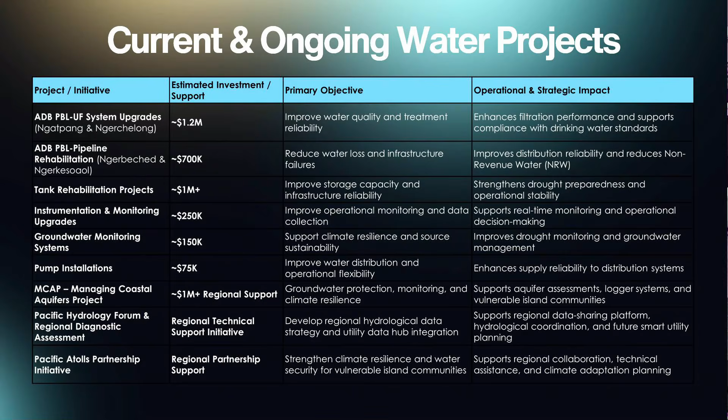Right now we're slowly building the foundation for a smart utility system where monitoring and operations are connected as one system. This is the direction we're looking into for the future of water operations. In my next presentation, I'll further discuss the transition from traditional utility to smart utility, the direction we're trying to move toward. Thank you very much.

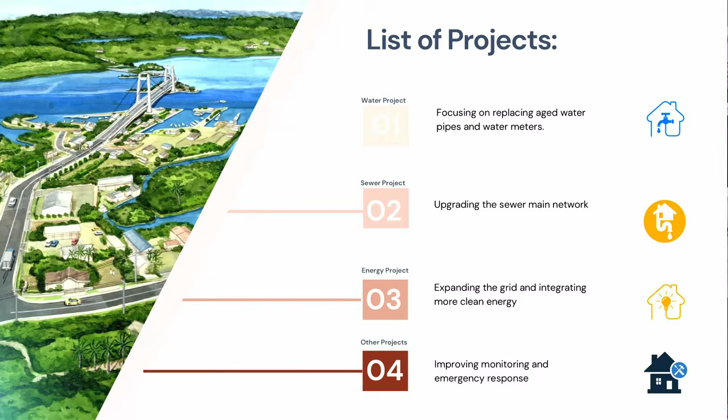I guess for a lot of farmers and people from agriculture, you know the saying, farm to table. For people who protect the environment, there's a saying, they protect from the ridge to the reefs. From PPUC, we care from the sunlight to the street light. And if it's water, we see it's raining outside, we take it from the clouds to the comfort room.

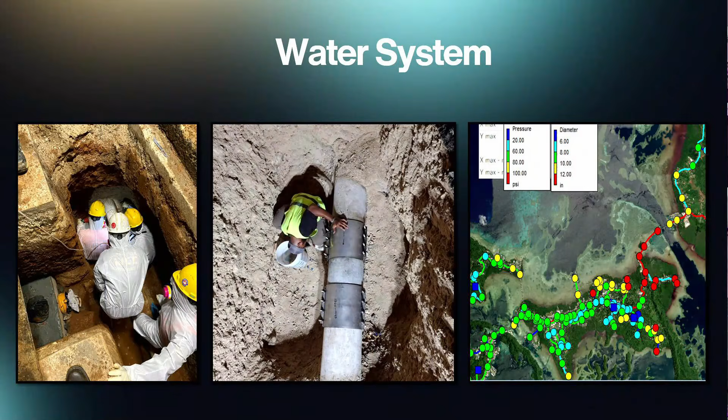So for the first system, I would like to cover the water system. The 3 pictures I present today show some of the main issues we are facing on the water system, and I believe everyone in this room is aware or has some idea of these issues.

The one on the far right and the middle picture show our people replacing or repairing one of the very old asbestos cement pipes. You may see from the attire in the picture on my far right, it's a hazardous material, hence the full PPE. Those pipes are over 60 or 70 years old, hence they frequently break.

The picture on my left, where you see green, yellow, and red dots, shows the current water pressure of the Koror area. Good water pressure would be higher than 20 psi and would fall around 40 or 50 psi. From this diagram, we can see there are still a lot of areas that receive more than that.

If you receive water pressure higher than that, the system is more susceptible to breaks and leaks. Hence, we have a very high non-revenue water, or NRW, close to 50%. The red dots are areas receiving water higher than around 100 psi. The yellow is close to 80 psi, and the green is close to 60 psi.

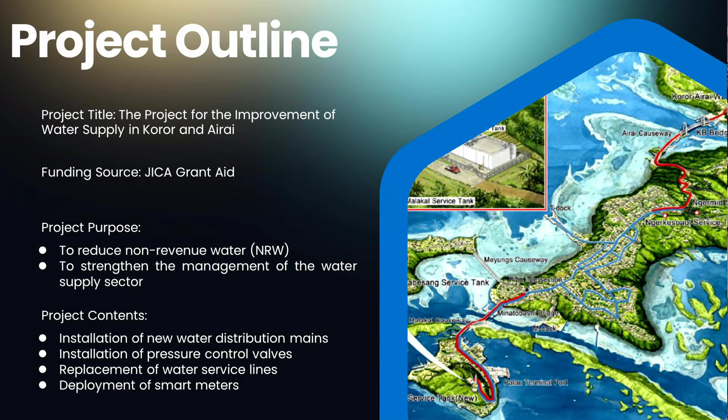We will also be installing pressure control valves throughout Koror. As I said, we still have areas that receive over 100 psi water pressure, which results in more frequent breaks. We will also be introducing some new technology, for example, smart meters.

With this project, there are 4 main issues that we face on the water system currently. We have old water pipes, which are still asbestos cement. We'll be replacing them with plastic pipes, both PVC.

The PVC is the pipe that we currently have on island. We're also going to be introducing HDPE pipe, which is like PVC, but thicker and more flexible. Our hope is by introducing that pipe, we'll face fewer breaks in the future.

We have a high non-revenue water. Non-revenue water is basically water that's treated and not being read at the meter. So we'll be introducing pressure control valves on each water tank to better regulate the pressure, and provide training to our leak detection team so that we can find leaks that do not come out of the ground. We'll also be replacing about 1,000 water meters throughout this project.

Before, in 2016, our thought was that non-revenue water or leaks only came from breaks on the water line. We've come to realize that a large percentage of the non-revenue water also comes from inaccurate meter readings or inaccurate meters. So in 2021 to 2022, we did a pilot.

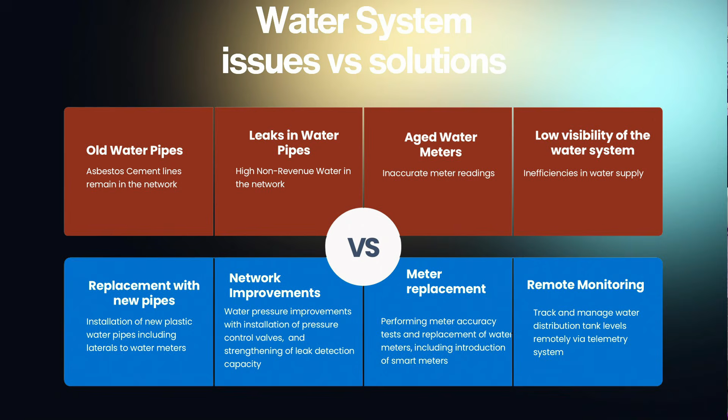So for CASP, we've already finished installing the sewer lines. We've finished constructing some of the sewer pumping stations - this one is in Makati. We finished constructing a new sewer treatment plant. And we've also constructed, I don't know if everybody knows, but under CASP, we've constructed 2 public toilets.

So for the sewer line, we've installed it from Makati all the way to the CIP office, skipping Minatobashi, and then from Malakal all the way to the sewer plant. We've also constructed a new pumping station at Makati, and that was in 2019.

We've commissioned a new sewer treatment plant that's currently in use. We've been using it since November 2021, and we've constructed the public toilet at Erongul Park, and the toilet at Long Island. But again, it's not our service to operate and maintain, so we did an agreement with Koror State - operation and maintenance is with Koror State.

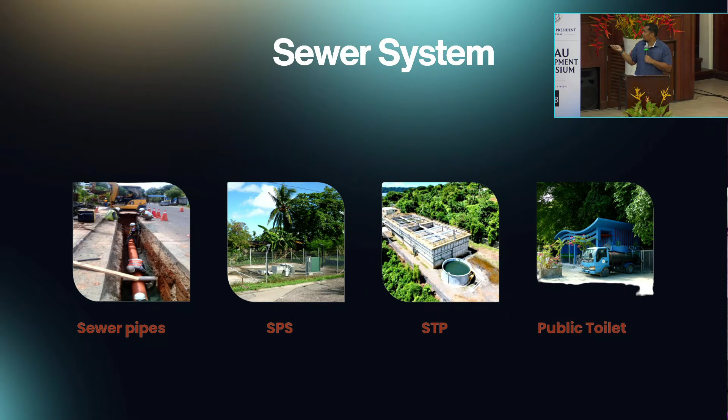So what is still left in the project - we've completed all that, but what's remaining is the sewer line from the CIP office, the old CIP office, to the Malakal treatment plant, which is not yet operational. There are 3 reasons why it's not operational: the new pumping station at the CIP office is not yet complete, the connection at the Minatobashi line is not yet made, and the sewer pumping station across the Malakal port is not yet complete.

So under this project, and we know that CASP has been ongoing for over 10 years, in 2023 I recall with the effort of the Congress and the Office of the President, they did an MOU with ADB to say let's look for funds, in grants not loans, to complete this project. So ADB has provided a $2 million grant to complete this CAS project.

So if you head towards Malakal, you'll see we've already fenced the old CIP office area and construction is now ongoing. At the old CIP office we've started construction - we broke ground for the first time for this project 2 weeks ago. Near the new Minatobashi construction, you'll see WCC staff - those are the subcontractor for this project.

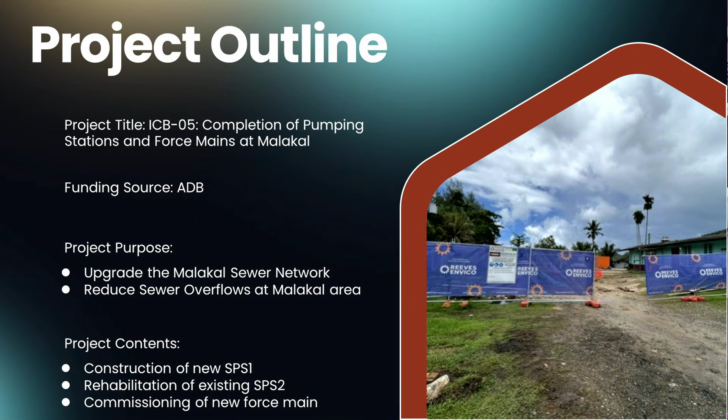So you'll see some Surangal staff working on Minatobashi, and then maybe some guys from Australia and guys from WCC working on this project. This is underway and we expect it to be completed this year, in November.

So after that project is done, we will have a fully functioning new sewer system from Makati all the way to the sewer treatment plant. That will reduce overflows at Libu Street, especially across Palau water and near...

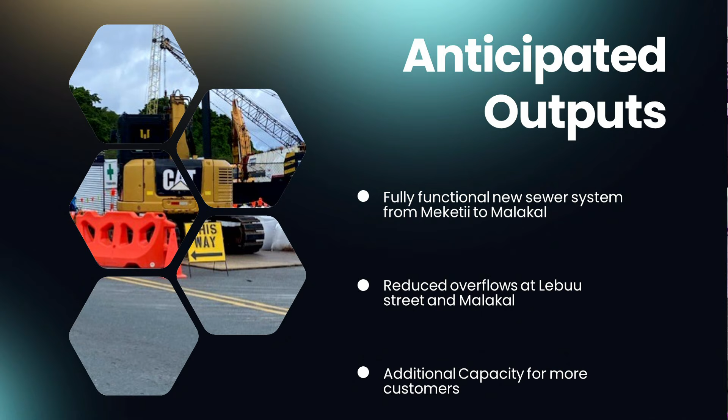Now, last but not least, I would like to touch on the upcoming and ongoing projects for the electricity system. This started 2 years ago, and we're now at the warranty stage. We've completed the installation of a new transmission line from Malakal all the way to Koksay. We installed over 450 new power poles and a new transmission line that runs from Malakal all the way running on the east side and to Koksay. So from this project, we expect to improve the stability of power.

I believe Manny will be sharing some information on this later. But one of the benefits we see here is - I know there's a project from the Republic of Palau to provide power to the new jail, a new correctional facility. With the facilities we've installed here, we're now able to extend power to that new facility.

Also, another project is - there's a large solar facility at Koksay, but we've also seen a large and very rapid growth of solar rooftop systems in Palau. So what we realize now is that, in addition to our diesel power generation in both Malakal and Aimeliik, we have an abundance of generation. What we lack since COVID is we haven't seen the same growth in load or usage. So what we end up with is excess energy.

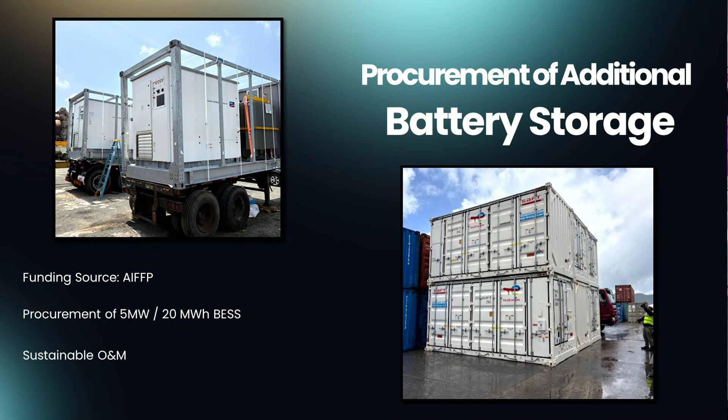Only 2 engines run with the solar. Now with this battery, we can capture the excess energy during the day and extend that 2 diesel engine operation, or extend the period where 1 engine is off. Rather than 5 p.m., we can extend it further, maybe to 8 or 9 p.m. The benefit is lower fuel consumption and better efficiency on the system.

Under the JICA project, we used to have aged equipment and low capacity. After that project, we now have newer equipment in Malakal, Airai, and Koksay. With this new equipment and added capacity, we can also

connect an additional 7,500 customers to the grid. With the additional battery coming from a grant, we will be able to extend the life of the engine shut-off, save fuel, and improve the economics of the solar project, hopefully leading to better power rates.

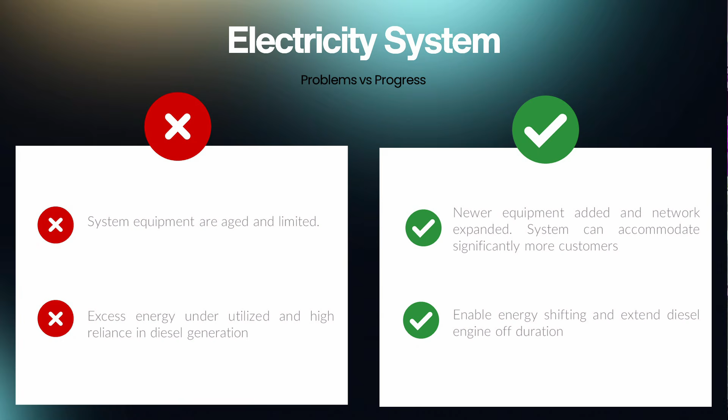So in summary, these are the upcoming projects from 2026 to 2028, all thanks to the collaboration that our government promotes with our partners, including JICA, ADB, AIFFP, and many more.

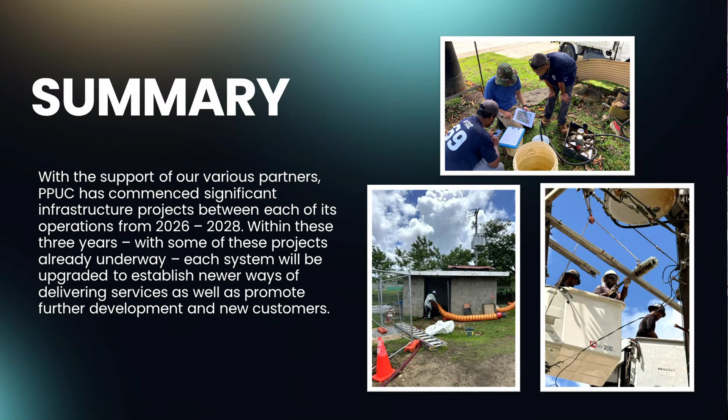With these upcoming 3 years and the completion of all 3 projects, we envision delivering better services as well as promoting future development in these new systems. Thank you.

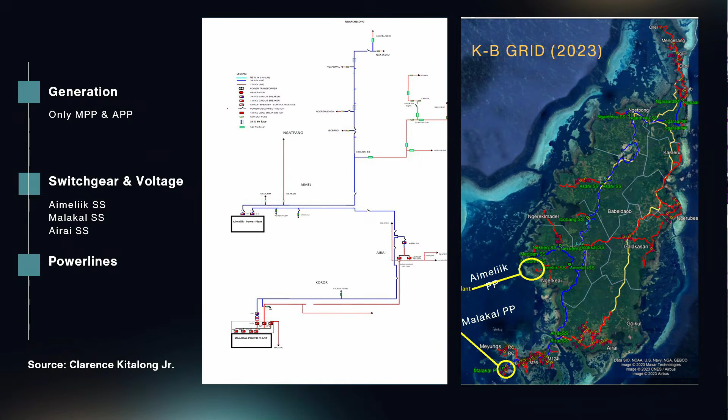So when I say it's a radial feed: the Malakal power plant has a single line connecting it to the Airai substation, the Airai substation has a single line connecting to Aimeliik, and Aimeliik going north is a single line. So if you lose any one of those lines, you split the power plants. That's what I mean by before 2023 it was a radial system.

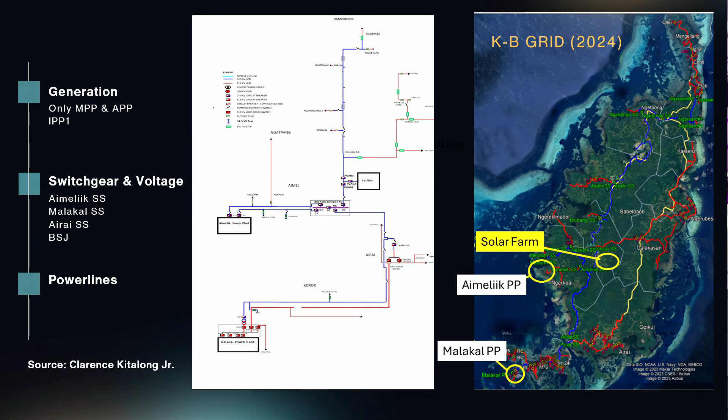Then in 2024, we had the introduction of the IPP solar plant as well as the bus stop junction. This was really significant in terms of system architecture because it added a loop, a redundant line between two of the power plants. It looks like this.

Malakal power plant and substation is connected with one line to Airai and one line to bus stop junction. But the difference that happened here was from bus stop junction to Aimeliik, there are two lines connecting it. So if you lose one line, you can still route power to the other side. That's what I mean by a redundant circuit, a loop - you have two lines connecting the substations.

So when we first connected bus stop junction, there was a power outage on the northern line between Aimeliik and bus stop junction, and the power plants did not break because we had an additional line that connected the power plants and kept them in sync together. So that was a big change.

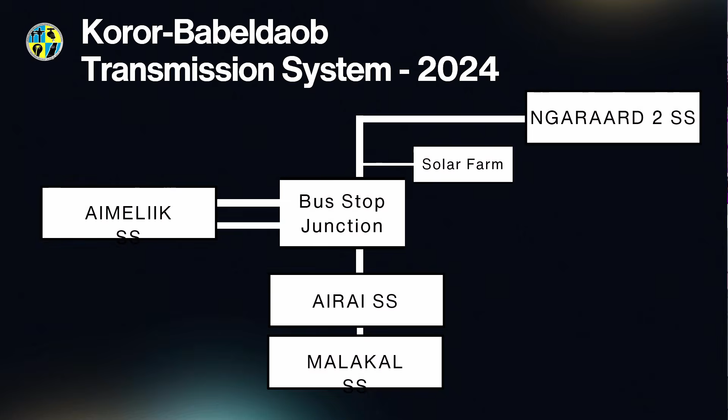We also added the solar farm to address the renewable energy targets we're mandated to meet. Talking about the IPP, it's funded by the Australian Infrastructure Financing Facility for the Pacific as the primary funding source, with Solar Pacific Pristine Power as the EPC contractor. Quick highlights: it's a 15 megawatt solar PV plant with a 12 megawatt hour battery, and it's supposed to give us up to 20% renewable energy in terms of energy usage.

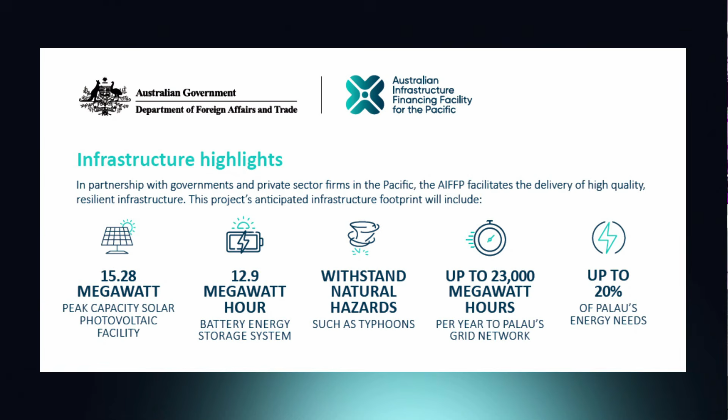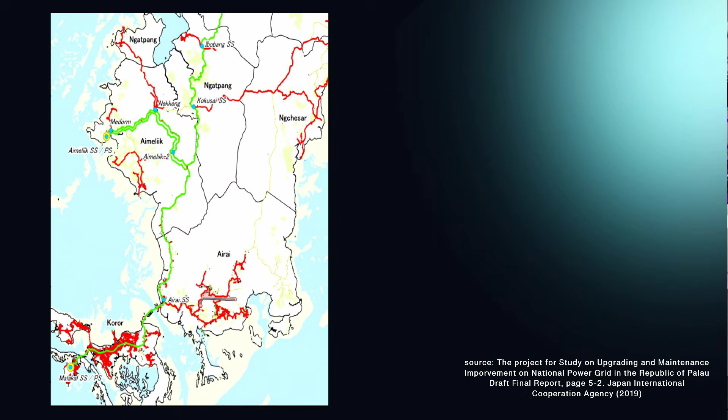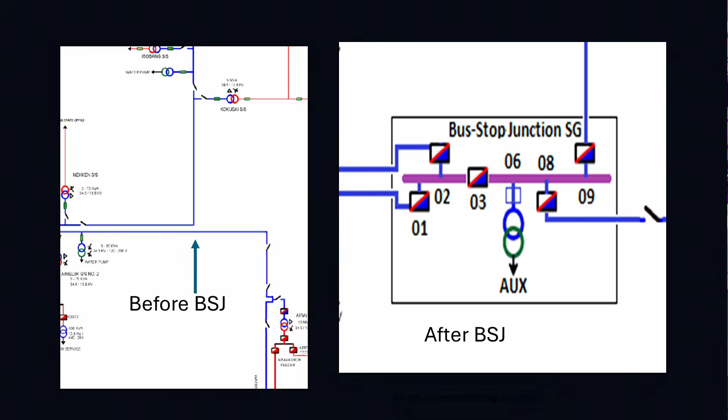So let's see - before the bus stop junction, there was a line connecting Airai straight to Aimeliik, and then Aimeliik going up north. There was actually a point, like when you're driving on the compact road and you turn into Aimeliik at that bus stop junction, where those two lines are physically next to each other but electrically separate. So what we did is put a bus stop junction there that connected them.

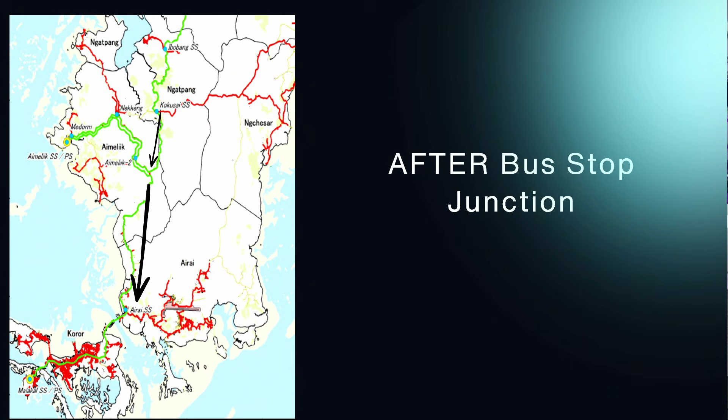The purpose is so that before and after the bus stop junction, power from Kokusai can go straight to the load center in the south without having to go to Aimeliik and back to the same point on the map. That reduces our transmission losses. Having that bus stop junction also increases the reliability that our solar farm can reach the load center in the south without interruptions between Aimeliik and the bus stop junction.

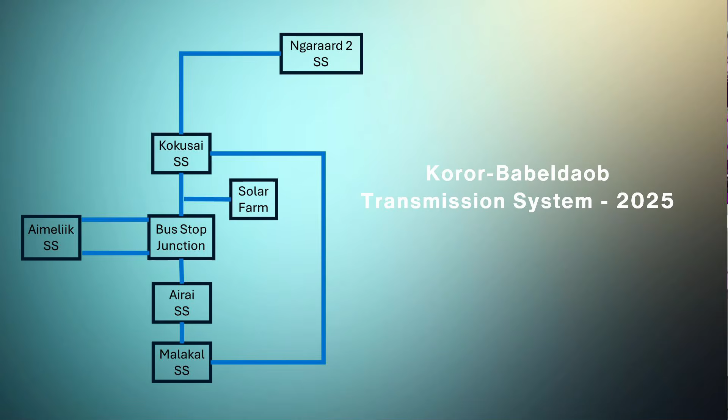So the next big thing was in 2025. We had a connection of the transmission line. The JICA project, which has just recently completed, installed a new transmission line running from Malakal substation in the south all the way up to Kokusai in the north.

And what that did is create another loop in the southern part. So if you lose the line between Malakal and Airai substation, Malakal is still connected to Airai substation by going through the loop. So when you lose a transmission line, you don't lose any service to the substations.

Which is important because we're moving all our customers to the substation connections, so this means that if you lose a transmission line, there's no power outage experienced by customers once we're complete with this. And that's a significant point.

About 3 weeks ago, we had an outage on the Aimeliik to Airai line. Prior to 2023, that would have been an island-wide outage. But 3 weeks ago, we had that same fault happen, and no one knew about it because we didn't lose power to any customer. That is the significance of having a loop, having two redundant lines to every single substation. And that's what we have right now.

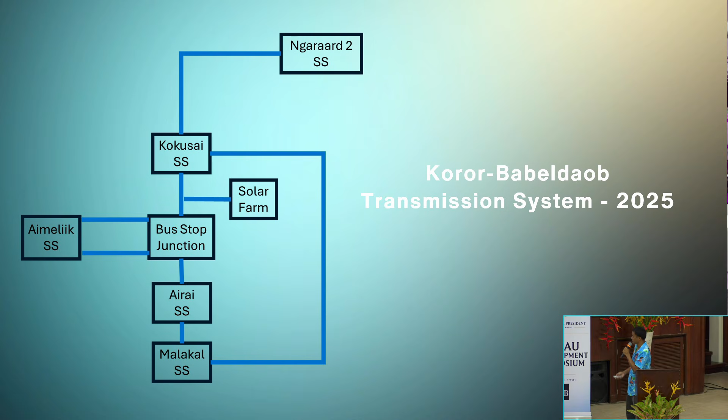Before, you had this radial system, let's see. On your left, there's a radial system where there's only one line connecting the substations.

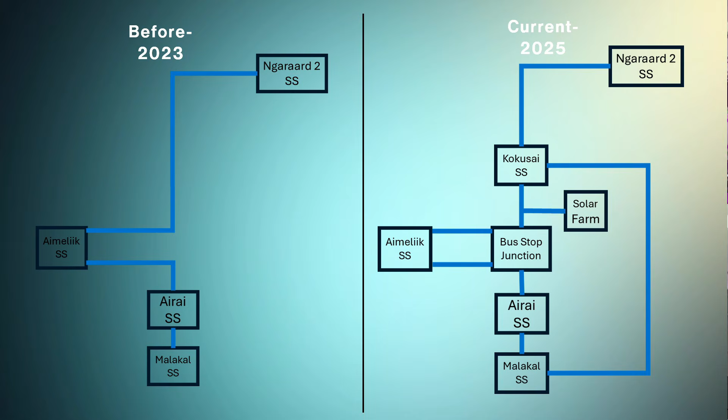Now in the southern Babeldaob, we have two loops. We have a loop between Aimeliik and Bus Stop Junction, and then a loop from Malakal to Kokusai, down to Bus Junction, and down to Airai substation. So if we lose any line on any one of those loops, we can still maintain our power to all the substations. This has greatly reduced our number of outages, as well as the time to recover from any sort of outages that does affect customers.

This is significant because what this will accomplish is provide the same sort of stability and reliability that the people here in the south today experience, in the north. And this is important for development of Palau because the first prerequisite of having development is stable power. So we will have stable power in the north once we complete this.

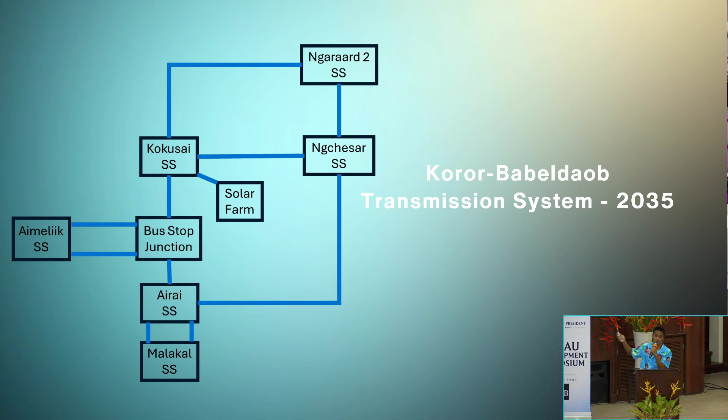And we make this transition to having another loop system. So if any section of the northern loop goes out, we can still route power to the other side, and only that section of the transmission line will be down, and it won't affect any distribution feeders.

So how are we going to do that? With our system control, this is all about the substations. We're going to be upgrading the substations, adding the Ngchesar substation, pulling the 34 into the Airai substation, and redoing Malakal substation. So a lot of upgrades to the substations.

We've already done most of the transformers. We're going to upgrade, add some other transformers, replace other transformers so that we can have really strong redundancy in our transformers as well.

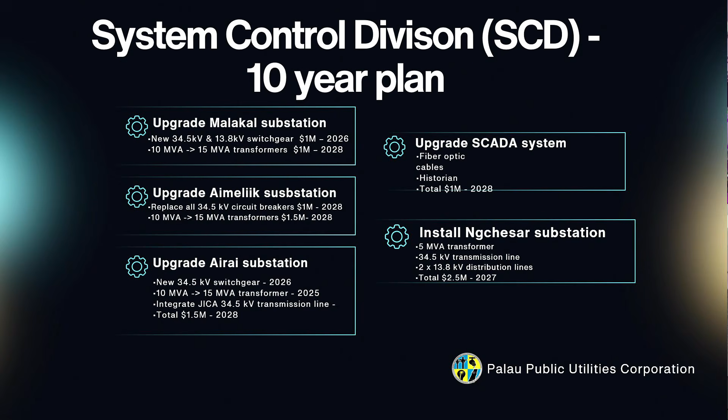They're in the single-digit metrics, as opposed to our goal, which is around 200 minutes per year. So that's 3 digits. Tokyo is at about 5 or 6 minutes per year. What that means is that in Tokyo, the average customer experiences 5 minutes of outages in a year.

For us in the Pacific, our goal is that the average customer experiences 200 minutes of outages per year. When we started in 2023, our actual was over 2,000 minutes per year. So that gives you perspective on the significance of changing this.

When you change from bare wire to insulated wire, you remove a lot of the outages caused by rats, birds, and snakes covering those insulators, because you no longer have a close path to earth. The insulators are about 6 inches long, so any animal that size can touch the line and the ground at the same time. If it's insulated, you can avoid a lot of these outages caused by animals.

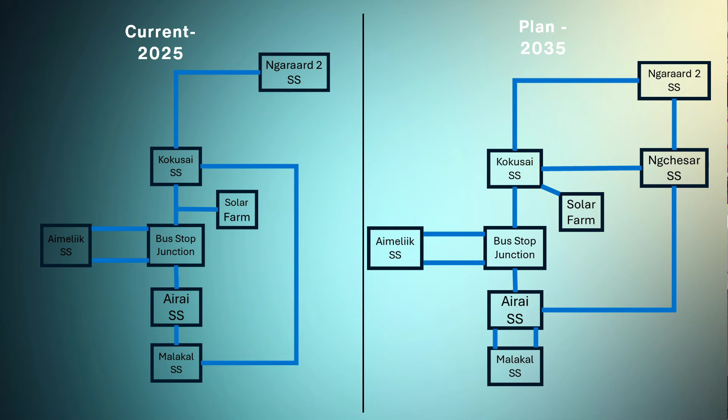So this is an overview of what we're going to be doing. Right now we have two main loops, Aimeliik Bus Stop Junction and the Southern Loop. But within 10 years, our goal is to have 4 loops for the transmission system, and to really increase reliability up in the north to promote development.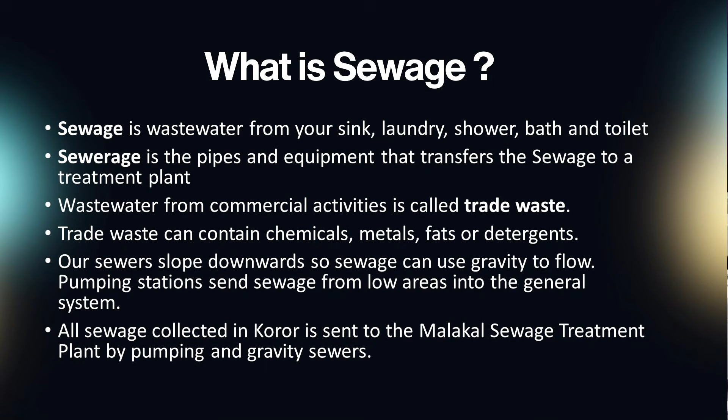So all sewage collected in Koror is sent to the Malakal sewage treatment plant, which is pumped and sent through the gravity sewers. The next slide is an overview, the map about the Koror sewage system.

We have two sewage systems: one is Koror and one is Melekeok sewage system. I'm more focusing on the Koror sewage system. We have about 42 pumping stations, which we call WCS, that's wastewater collection systems. All these pumping stations are across the hamlets, everything connected to the nearby manholes, and all the sewer is pumped to the pumping stations, to the laterals, and into the main gravity sewer main, which will bring it to SPS1 and SPS2.

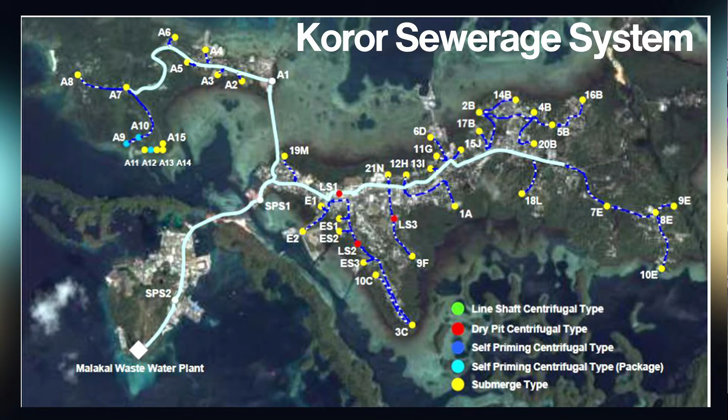All this sewage from across the hamlets is being brought into the main interceptor pumping stations. One is SPS1, close to the Minatabashi Bridge, and SPS2, in Malakal across the port area. Those are the main interceptor stations. We pump from there to the Malakal wastewater treatment plant, near the Icebox Park.

This is exactly what we have with reference to the problems in the sewers. We have an old system, already 50 years old, that we are still using. Each system has cracked pipes, broken pipes, and also collapsed pipes. All these lead to rehabilitation, meaning we have to repair all the time and make sure everything is always functional so that everything is carried to the sewage system.

Blockages happen because of grease buildup and foreign objects coming into the pumping stations. Our operations team regularly cleans the pumping stations, checking and making sure there are no blockages. If there are any blockages, we get reports and take care of those issues.

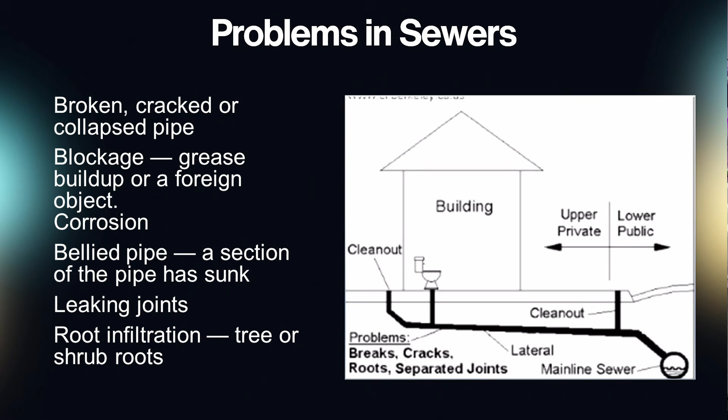We also have root infiltration and bellied pipe issues, which are being taken care of. Root infiltration happens because of nearby trees growing close to the pumping stations, which intrude their roots into the piping section.

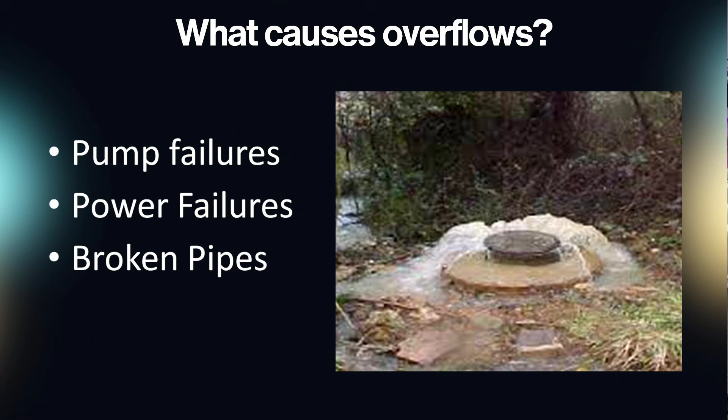What causes the overflows? The overflows are caused by pump failures, mainly mechanical and electrical failures. Also, if there is any broken pipe, the sewer cannot be brought into the pumping station, and in between, the manholes will overflow. So that is also one reason.

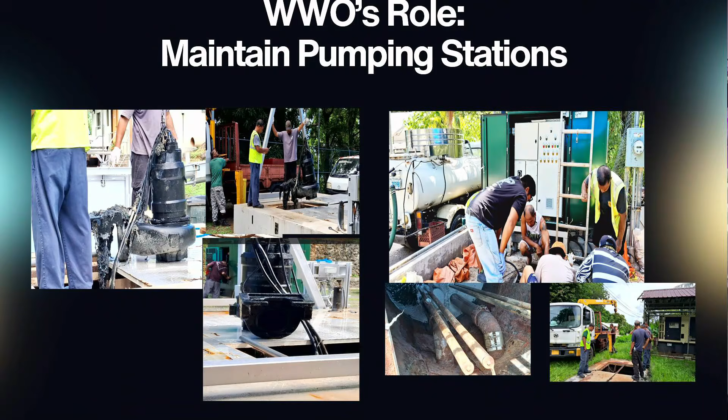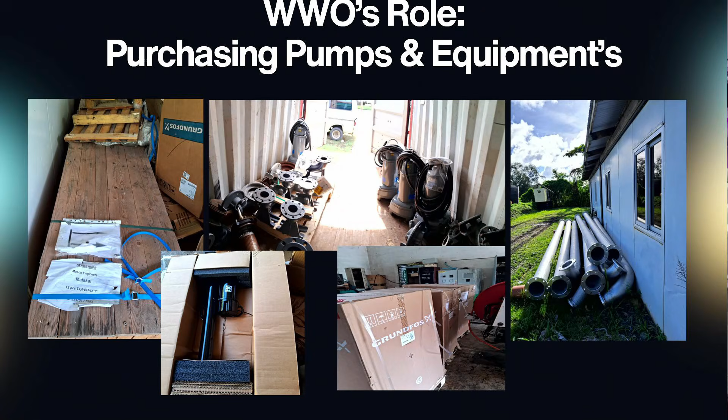Like that, we have 42 pump stations that we handle on a daily basis. We have a routine team handling these issues, and we also have a team, including me, doing all the purchasing of pumps and equipment required for this activity to go on smoothly daily. You can see the project requirements, some pipes and pumps, and also electrical components and devices we have already stocked for our activity.

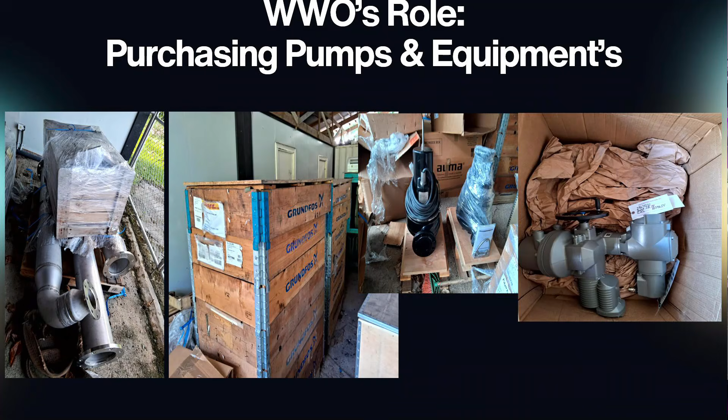This slide is also explaining some of our equipment and pumps for the plant, the treatment plant at Malakal.

I'll just give you a quick roundabout on the plant overview. You are free to come visit us, but the sewer smell might be a little awkward. Still, I would recommend you guys come meet me.

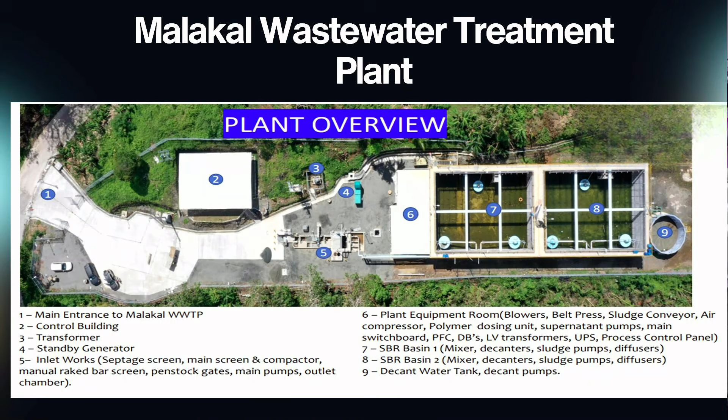I'll go into the next slide for your overview. That is the main screen I talked about, where all the rags and everything get separated from the sewer. Next to the right is the main inlet pump section, where 3 pumps are installed and working. Each pump acts as a duty pump, assist pump, or standby pump. Everything is electrically connected and controlled by variable speed drives, which are very costly equipment.

We have the blowers up there, 3 blowers, which are also electrically driven, and all the blowers send air into the reactors for the biological reaction process. This is not a chemical treatment plant, this is all a biological process.

After the process is done, the decanters will decant the separated treated wastewater into the outfall chamber and back into the ocean. There are also mixers in between the center of the basins, which are electrically driven. These mixers have propellers which drive the water for the mixing activity.

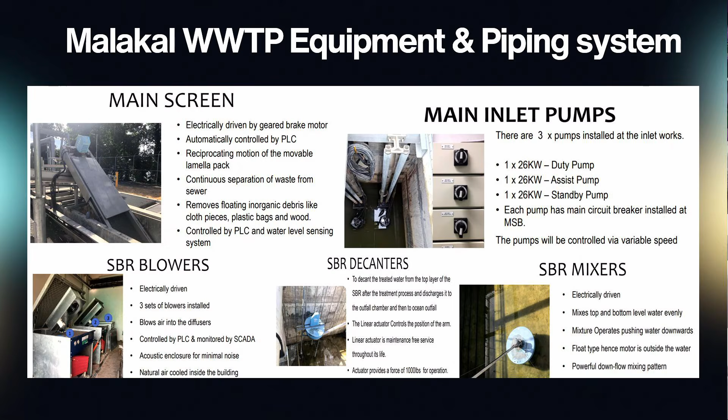The next slide has the sludge pump, at the bottom of the basin, which is at a depth of 7 meters. The height of the basin is 8 meters, so they installed the sludge pump at the very bottom. That's the pump which pumps out all the sludge from the decant at the bottom of the basin.

And into the belt press. At the bottom left is a belt press where all the sludge is brought onto the belt press, and on the gravity table along with the wash box, we feed decant water for the process to remove the flocculation and produce the sludge cake, which is transported to the landfill.

The membrane diffusers are also a major component at the bottom of the basin, connected to the blower piping, which blows air into the basin. That's where the DO, dissolved oxygen, is maintained. We supply oxygen to the reactor so it can do the reaction work.

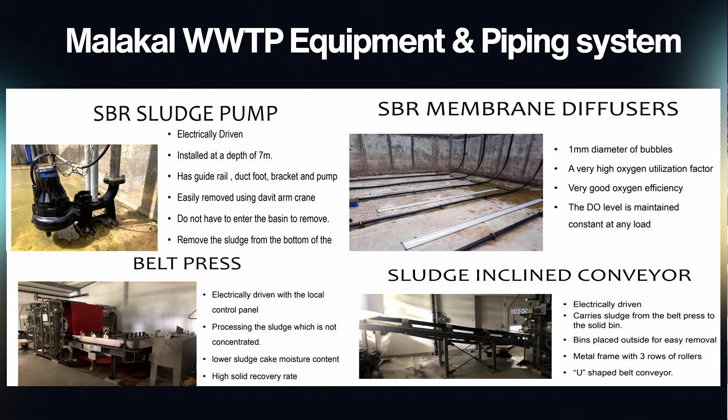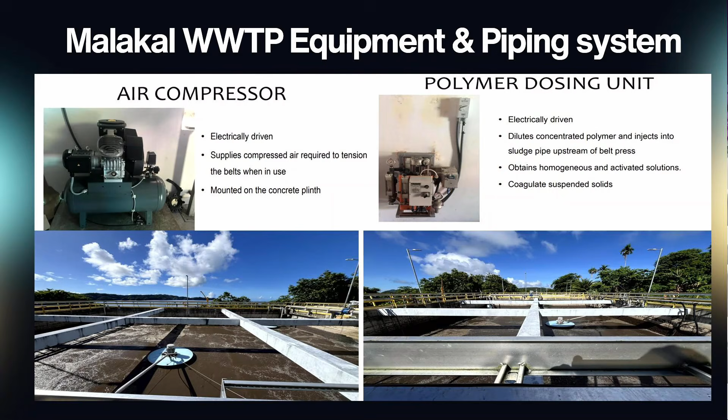The sludge line inclined conveyor is the belt that carries all the sludge into the bins. That's how the working basins look at the bottom. The top components are the polymer dosing unit and the air compressor for the belt press operation. This is basically all the wastewater treatment plant equipment and their piping system.

And we have our laboratory facility in the control building. And this is our team.

She's Kimi, our expert handling all the sampling and testing activity for the treatment plant. So we have some ADB consultants helping us with the process and the testing. We have recently rehabilitated our laboratory to accommodate more people to do the testing.

So this gives you an overview of our entire facility. This is a new facility, as I mentioned. Then comes the entire sewage network, like I told you in the beginning, we have 42 in the Koror region, and 8 in the Melekeok network. So altogether 50 pumping stations, and all these pumping stations are part of an almost 50 year old network. We need to maintain these facilities, and for that we need equipment and new pumps purchased every now and then to make sure everything is running and moving.

So equipment and structures are currently, in most cases, in poor condition. We are working on trying to reduce that situation, and we are doing all the required purchasing and installation of new pumps. We have already started repairing and upgrading the pumping stations.

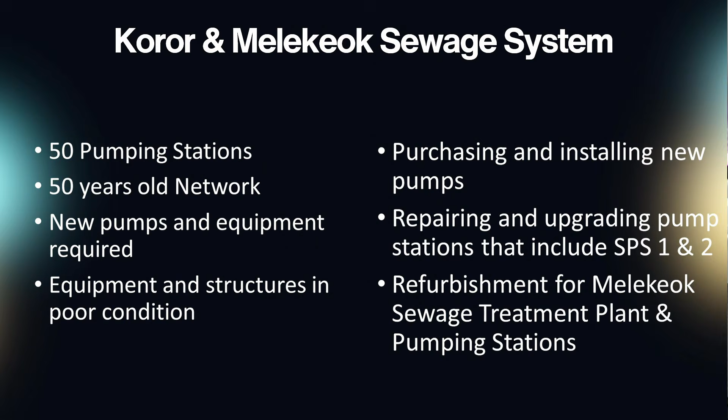That includes SPS1 and SPS2, as our colleague Mr. Anthony has already told you guys about. So we have a plan for refurbishment of the Melekeok sewage treatment plant so that we can accommodate more treatment process and more businesses connecting to it, and also the pumping stations. So this is our goal, sustainment and improvement efforts.

So the Malakal wastewater treatment plant, as I mentioned, was commissioned in October 2021 as part of the KASP project. This plant successfully meets the effluent quality discharge targets as provided by the EQPB board.

Then we have pumping station upgrade works going on in the Koror region, which actually drastically reduced energy consumption and also the number of uncontrolled sewage overflows. So this leads to our efficiency gains, like PPUC response time for system failures and customer work orders. We have reduced our response time to 2 hours. Before it was much higher, so we are trying to keep it as low as possible so that every issue is taken care of.

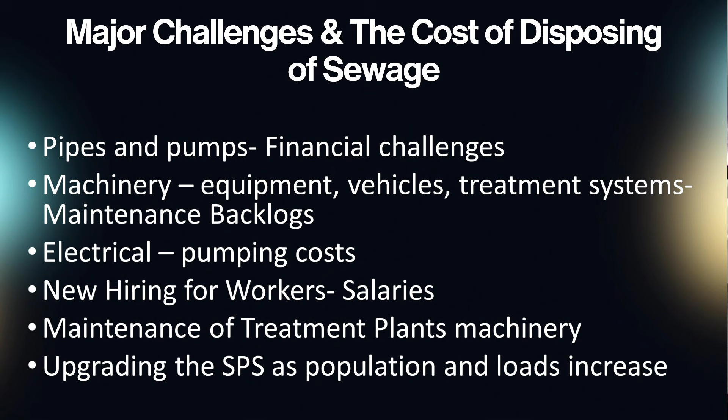So what are the major challenges in the cost of disposing of sewage? The major components are pipes and pumps, everything coming from outside. We have machinery and electrical components, and we need more team members and must pay salaries for them, plus maintenance of the treatment plant and machinery, and upgrading of SPS pumping stations as the population load increases within the region.

So future focus is to make sure we scale up our operations and reduce our downtimes, and focus on implementing cost-reflective tariffs, allowing the division to become financially independent. So with this, I'll finish my main activity. This is all about it. Thank you for your time.

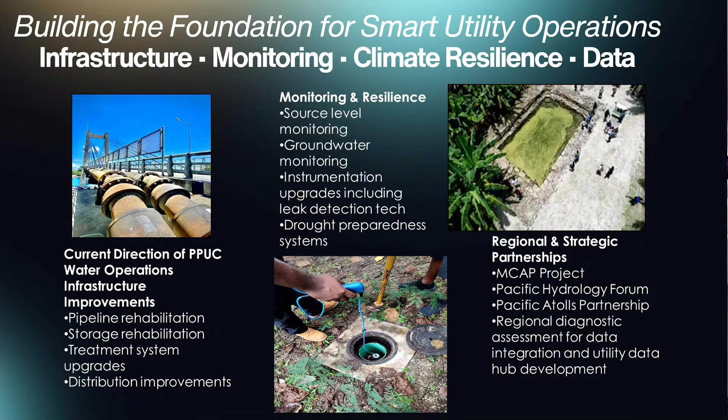Okay, next slide. So one area that is improving significantly right now is our operational monitoring programs. In the past, and still right now, everything is being manually monitored, and we're hoping this direction will improve this area. The overall goal is not to have full automation overnight, but to improve one step at a time.

My last slide. The future direction of our operations will also depend on how well we combine our infrastructure improvements, our monitoring programs, and our operational data into one coordinated system. So to summarize, we still have a long way to go, and we're hoping that all of this technology, the SCADA, GIS, and remote monitoring programs, will help us move along this roadmap for the future smart utility for water operations.

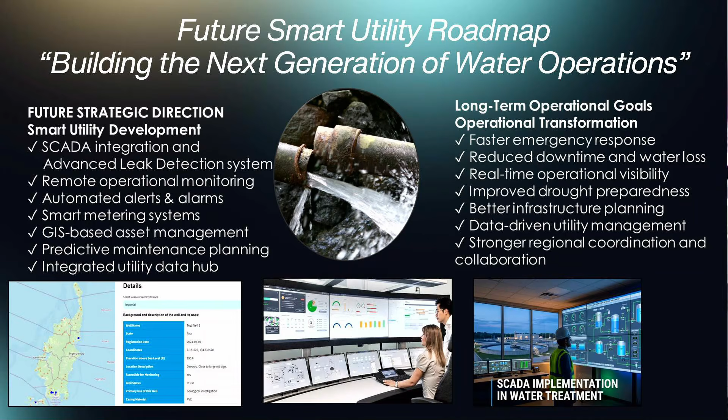That's it for me. Kaya? Sulang.

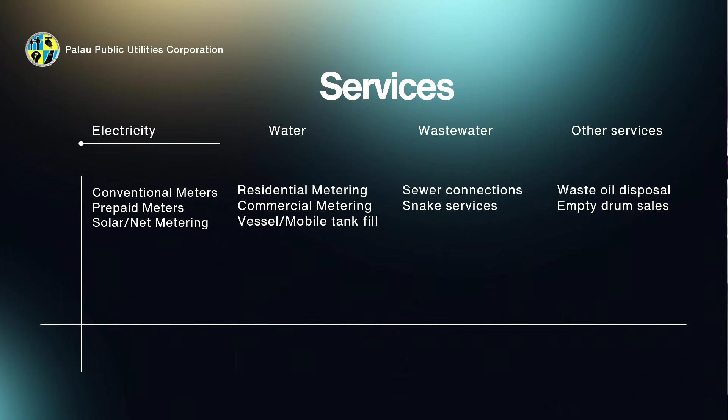Moving on to customer service and public relations, each utility within PPUC does more than simply provide a service. In addition to delivering electricity, water, and wastewater services, each department also performs ongoing maintenance, repairs, monitoring, and system improvements to ensure reliable, efficient operations for the community.

As part of the customer service representatives, we do have our customer service after hours, which happens after the 10 p.m. closing window. So if any issue occurs after normal hours, the after-hours hotline allows customers to continue reporting urgent concerns at any time.

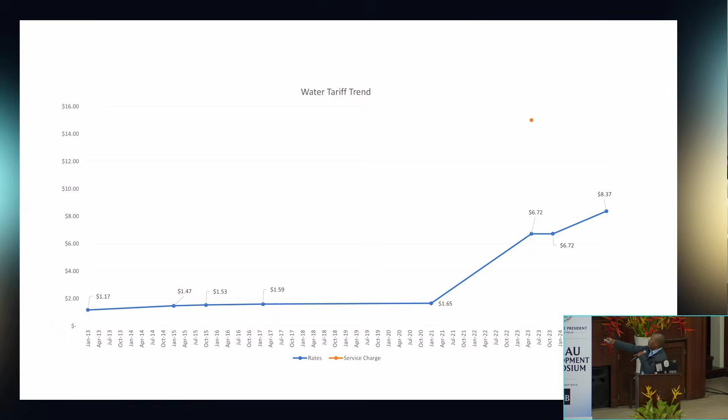So let's look at the water tariff trend over the years. Ever since January 2013, I believe it was the Merger Act, as you can see over the years, it was flat all the way until 2021.

And then from there, to capture the actual expense of the operation, as you can tell, in 2021 it was $1.65 per 1,000 gallons, and it moved to 6.72.

That 6.72 was around January 2023. I believe you guys remember there was also a service charge added then, $15 for residential.